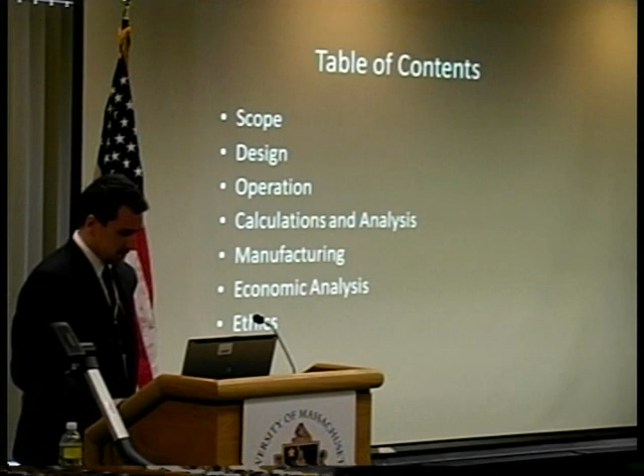The scope of our project is to design and build a deep ocean profiler capable of diving to 1,000 meters. It must be deployed and retrievable by one person, autonomously operated, and capable of taking measurements of temperature and pressure. We were given a budget of $3,000, and we had to design and choose all components to withstand a minimum

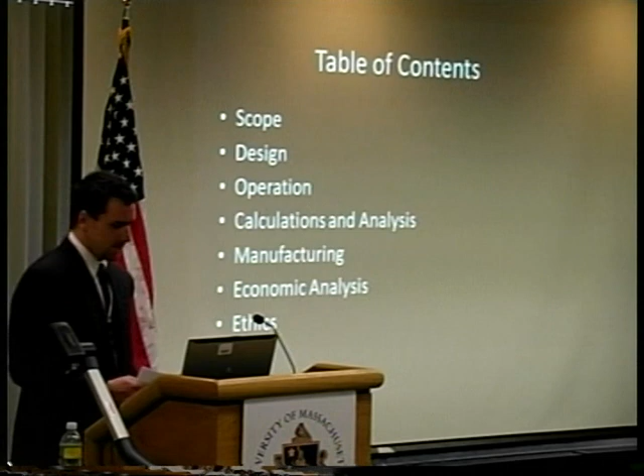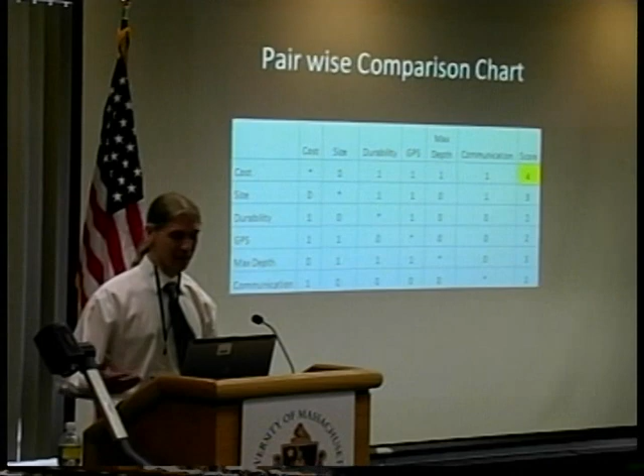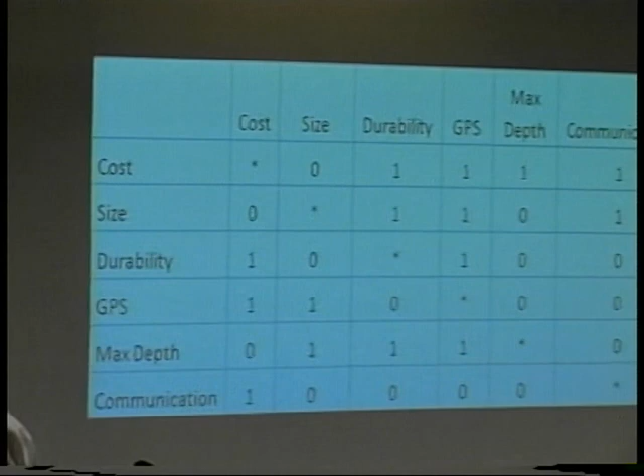of 1400 psi, the operating pressure at 1,000 meters. To distinguish our project from other devices out there, we focused on a few particular attributes. We chose cost to be most important, because what's already out there is very expensive, and with our budget being just a tiny fraction of the cost of a more professional device, we decided that's what we'd focus on. We also wanted something small, to be deployed and retrieved by a single person, which also saves a lot of money in the long run by not having to rent a crane and boats every time.

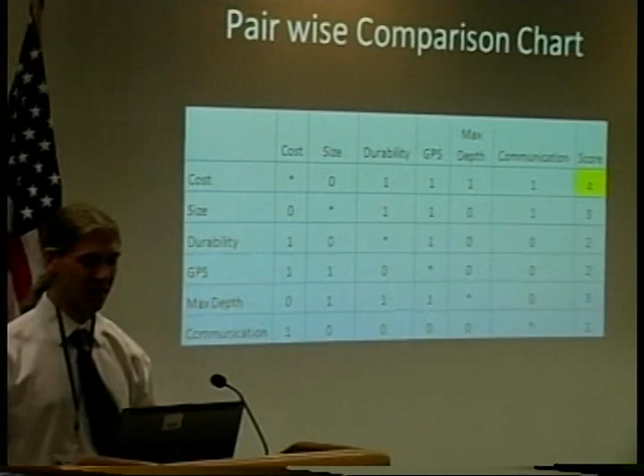We ended up deciding that GPS and communication were just outside of our scope for this project. We didn't even focus on them.

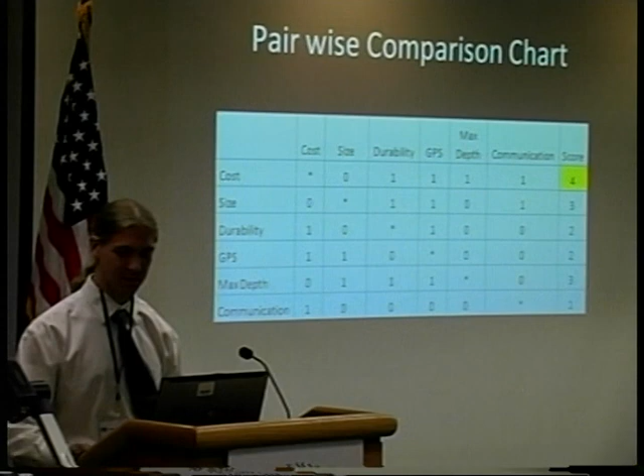We had several options for our hull, whether we wanted it made of aluminum or something stronger like steel. We had to choose various shapes. Something spherical has the benefit of being equally pressured on all sides, but it's very difficult to manufacture. And we had the option of several different O-rings, which was a design choice as well.

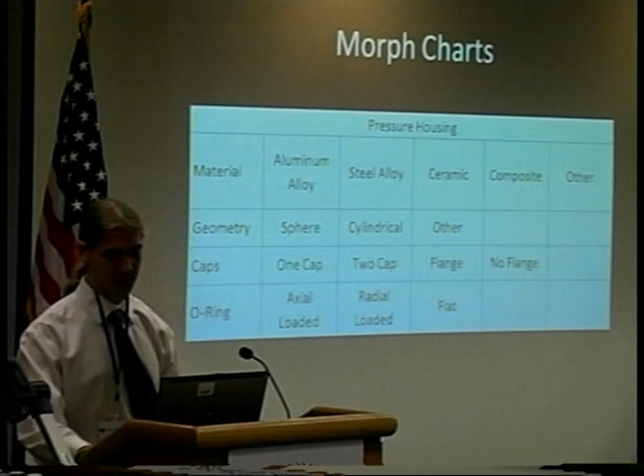For the buoyancy system, we had to choose between various working fluids, such as compressed air or carbon dioxide, if we wanted an oil bladder that would be inflated and deflated for buoyancy. And we had to decide if we wanted the chamber exposed to the ocean or self-contained.

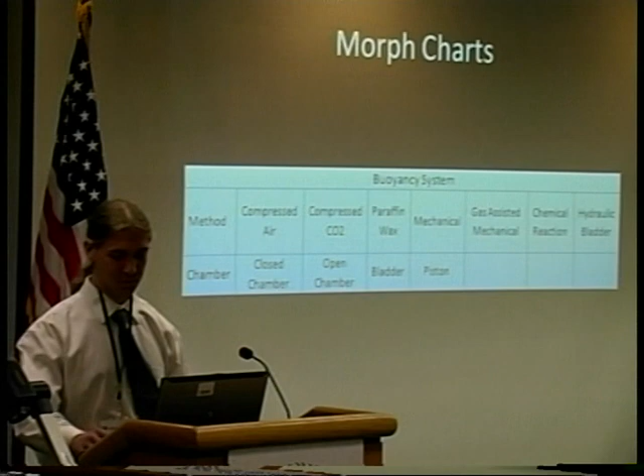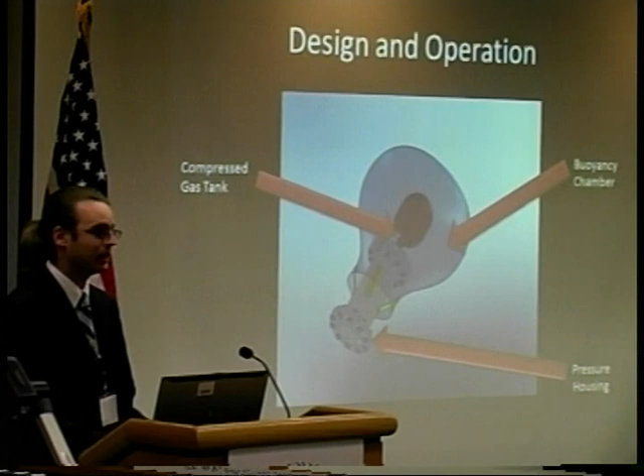So the design we came up with: existing systems are normally deployed from a large ship, with instruments attached to a cable and lowered by a crane, which is very expensive because you need a crewed ship. The other option is using an AUV, an autonomous underwater vehicle, which also needs a crane to deploy and is very expensive to purchase. So our goal was to make a product that was cheaper and easier to deploy.

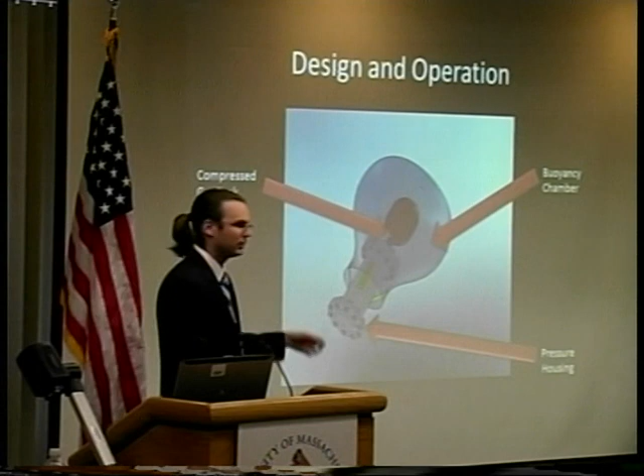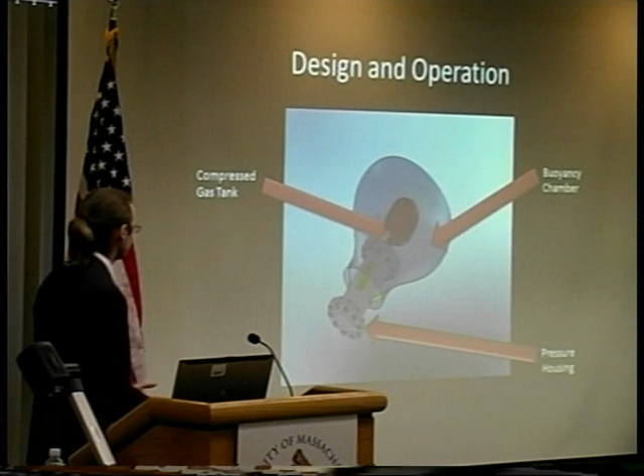The solution we came up with is an open buoyancy chamber compressed gas system. It works in three separate parts: there's an open buoyancy chamber, exposed on both sides to the pressure of the ocean; there's a pressure housing, which protects the microcontroller, the batteries, and all the electronics from the ocean water;

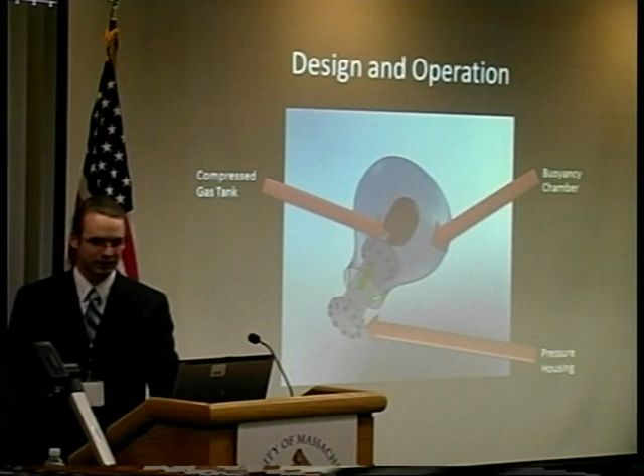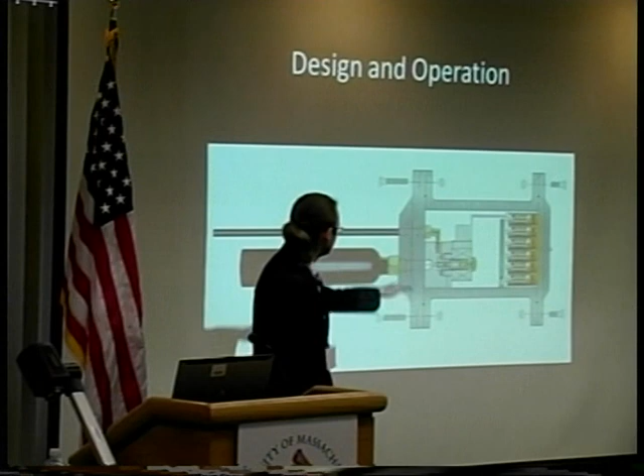and there's a compressed gas system, which uses compressed gas controlled by a solenoid to modify buoyancy once it's ready to surface. This is a cross-section of our device. We have the compressed gas system attached to a high-pressure solenoid, which is released back into the open buoyancy chamber, controlled by a microcontroller, along with our batteries, and a temperature and pressure sensor at the bottom.

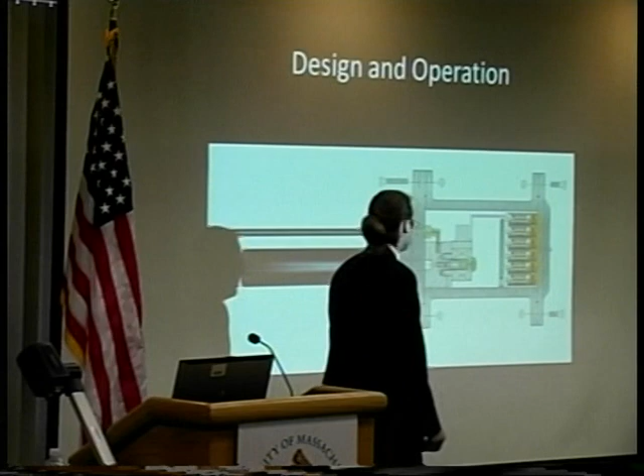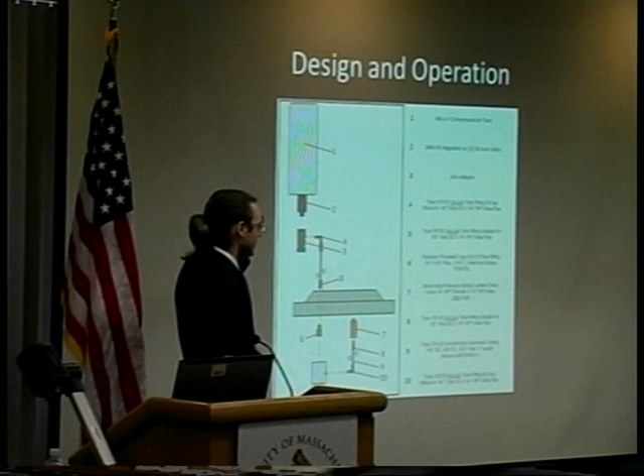This is a breakdown of how our compressed gas system works. We have a 3,000 psi tank regulated down to 2,000 psi, a shut-off valve connected to high-pressure hosing into the high-pressure solenoid, back out through a check valve, and back into the buoyancy chamber.

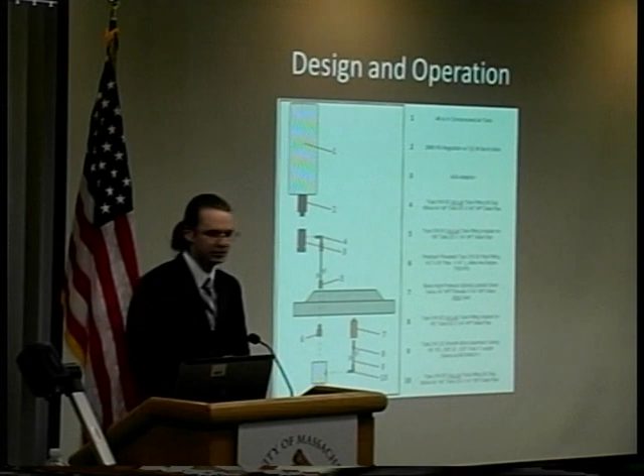The way our device is designed to operate: when it's on the surface, the microcontroller goes into dive mode. In dive mode, there's a solenoid at the top of the buoyancy chamber that opens, allowing the air in the buoyancy chamber to leave and flooding it. As it floods, that decreases its buoyancy, and eventually the device will begin to sink.

Once the microcontroller senses that it's sinking, it goes into sink mode, where it closes the solenoid so that it has a steady dive, and then senses, am I diving, am I diving, am I diving, and if it's still diving, it continues in the dive mode. Once it reaches the maximum depth that it's programmed to reach, it goes into surfacing mode.

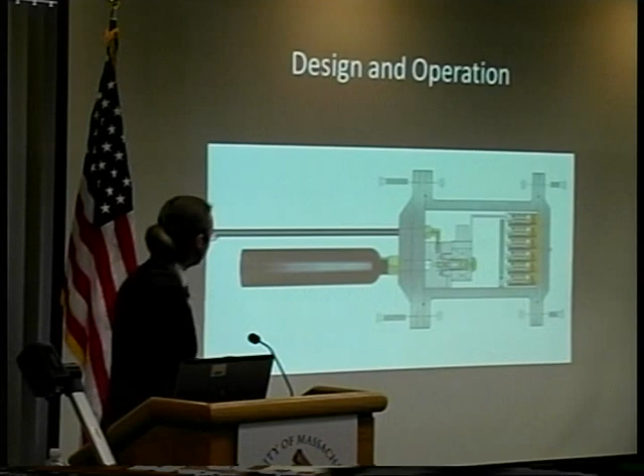It will open up the high pressure solenoid inside the chamber, and this high pressure solenoid releases gas through the high pressure lines into the buoyancy chamber. It will do that in 1 second pulses, and keep doing that until the microcontroller senses that it's rising, and then it goes into rise mode, sensing, am I rising, until it reaches the surface.

It also has a fail-safe mode, so if it's not receiving depth readings or pressure readings, after a certain amount of time, it will open the high pressure solenoid and just flood the tank to do like an emergency blow, or like a submarine. So what I'm going to show you now is a video of one of the tests.

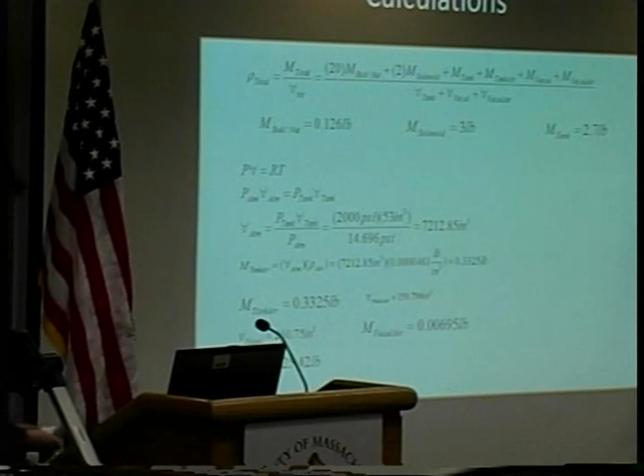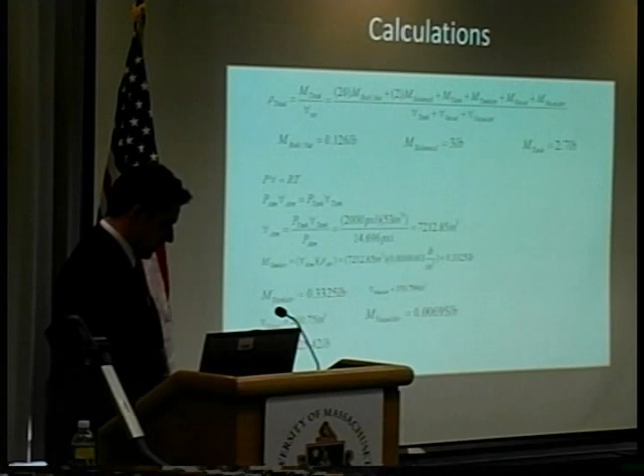The buoyancy calculations were very helpful in designing the buoyancy chamber. The mass of the pressure vessel and all the components we actually had to approximate because we didn't have these items when the buoyancy chamber was constructed. The density of the device minus the buoyancy chamber is determined by dividing the total mass of the device by the total volume. This yielded a specific gravity of 2.

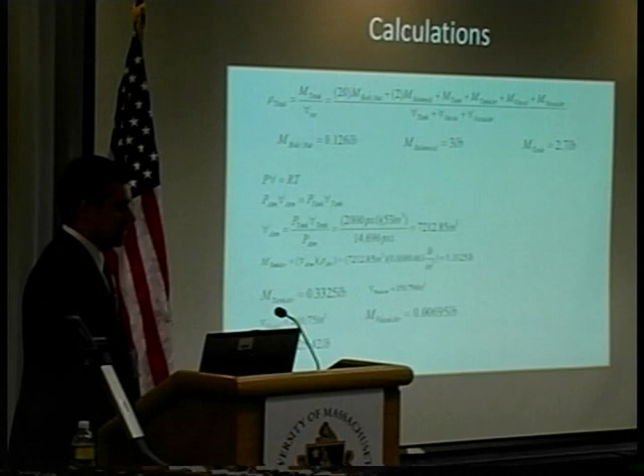We wanted to know how much additional volume was required to create natural, or neutral, buoyancy in the water with our device. We did this by setting the density of our device equal to the density of our water. We calculated the minimum diameter of the buoyancy chamber. The buoyancy chamber is spherical, so we wanted to find the smallest diameter possible to actually keep it afloat. We came up with about 10 inches, and so knowing that it's 10 inches for the minimum diameter, we went and made about 14 inches in diameter for our actual buoyancy chamber, just as a fail-safe.

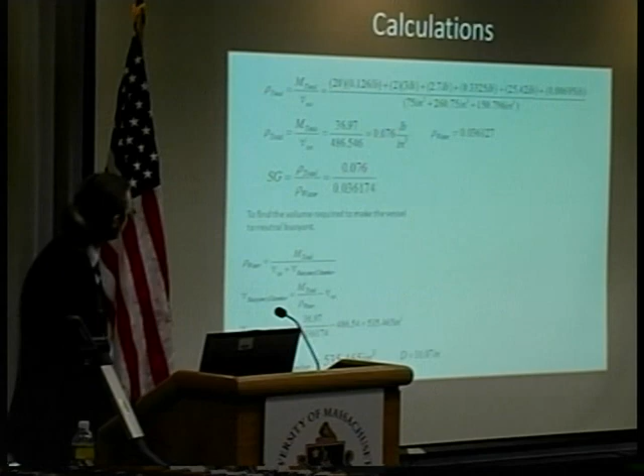This is the second half of the calculation, just stuff like that. So minimum diameter is 10 inches for that sphere.

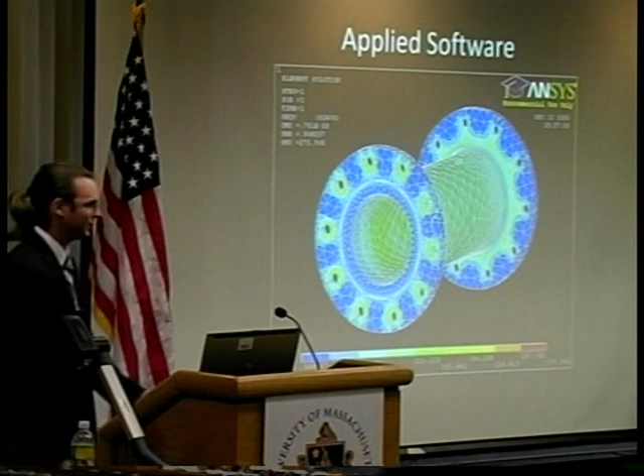To make sure that the device could withhold or withstand 1,000 psi, 1,000 meters of pressure, which is 1,400 psi, we did finite element analysis. So this is a full 3D rendering of our model, which we imported into ANSYS from SolidWorks, created a volume, meshed it. We fixed the bolts and fixed one side of the device.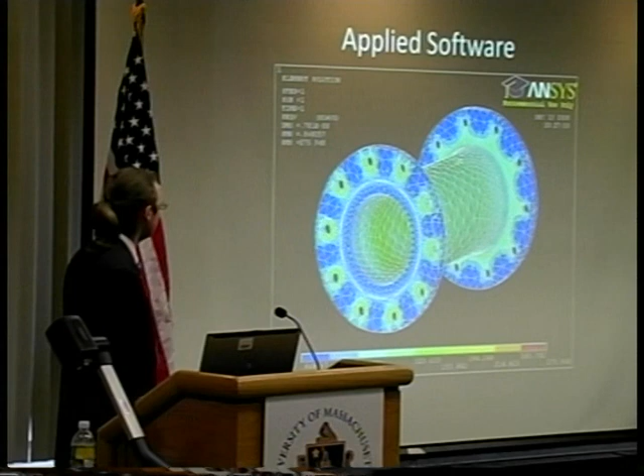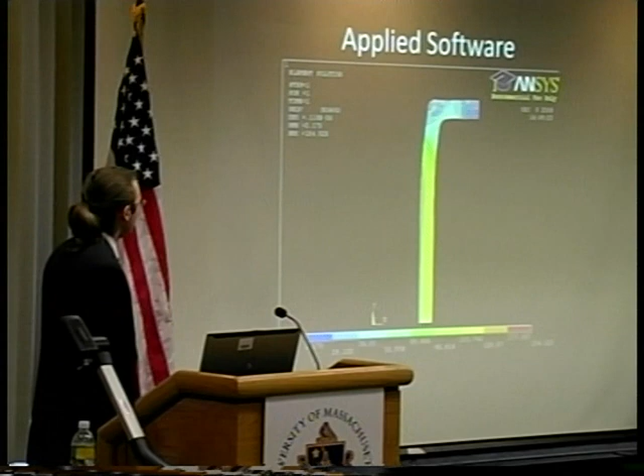The inside was set to 1 atmosphere of pressure, and the outside to 3,000 psi. What we found was stress concentrations, a bearing stress around the bolts, and we had a factor of safety of greater than 2 based on this. We also, to double check that, did an axisymmetric model, which is this one section of the wall, and we came out to very similar numbers.

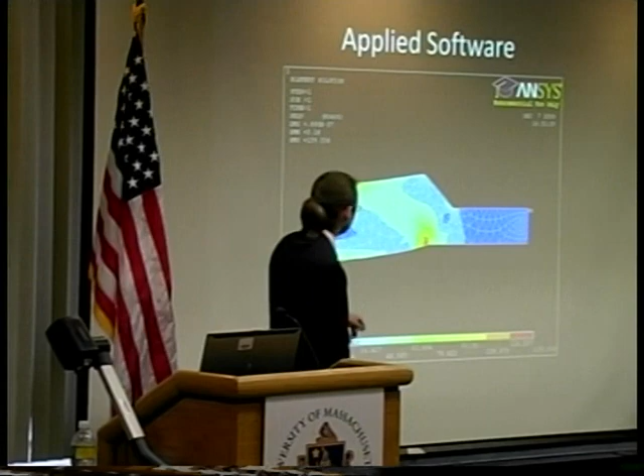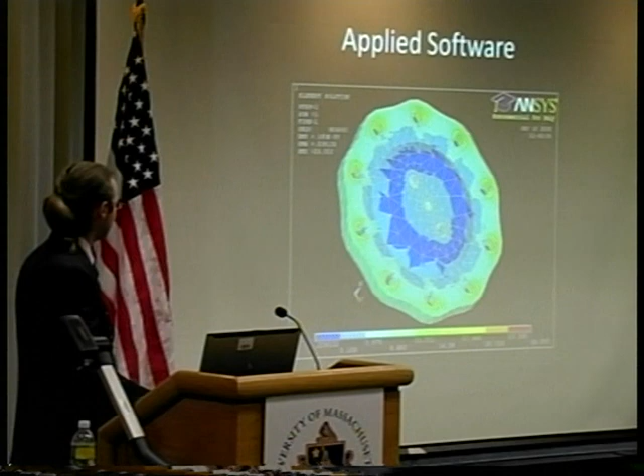We did the end caps. So this is an axisymmetric model of the end cap, and we found the stress concentration right at the flange and the wall that changed in geometry. Because of that, we modified our design and added a fillet to the inside and outside of the flange. This is a full 3D rendering of the end cap also.

And then to seal each end cap, we used a 1/16 O-ring, which was 5 inches in diameter, and 10 3/16 stainless steel bolts and washers.

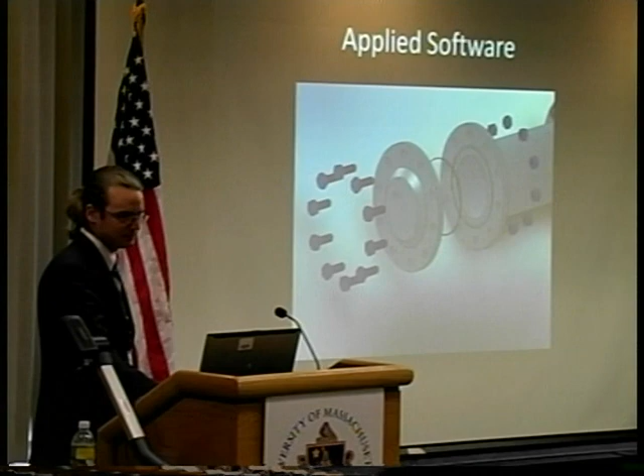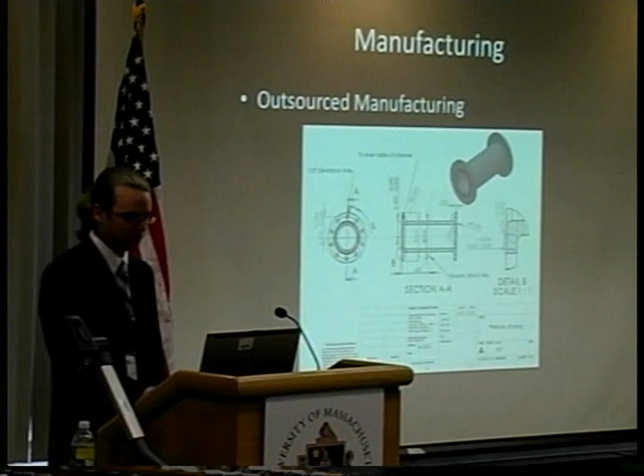Because the pressure housing was too large to really machine on campus, we had to outsource that and the end caps to a machining company.

The buoyancy chamber, we constructed with general all-purpose fiberglass. We actually bought fiberglass at Home Depot, that's how general it is. We use fiberglass because it's cheap, pretty easy to work with, and it has a very high strength to weight ratio.

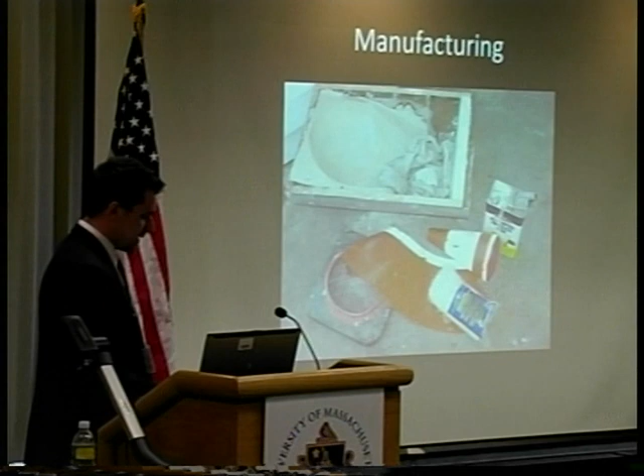As you can see, a mold in the back, it was not very precise, but that's a plaster mold we used to create the two halves of the fiberglass mold for the buoyancy chamber. We connected those with fiberglass, sanded it, and put some epoxy-based marine paint on it. We chose a very bright red color to make sure we can see it when it's deployed in the water.

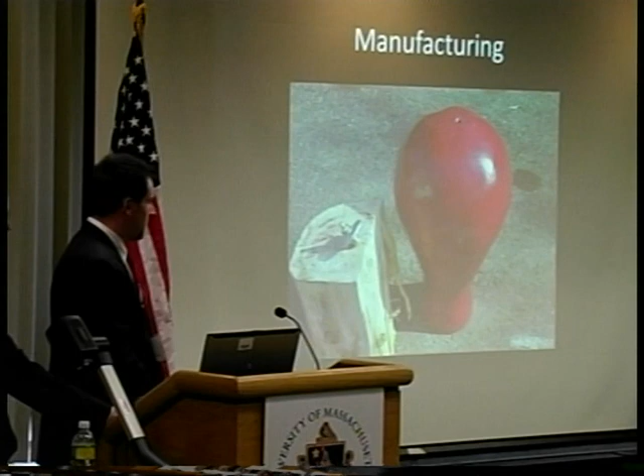We ran several tests for our device. The earliest tests were just to make sure the pressure hull was actually watertight, so we deployed it into the water, let it sink for a while, let it stay on the bottom for several minutes, then pulled it back up, opened it up, and saw if we had any water inside.

We also tested it with the buoyancy bell on top of it to see how well it would be buoyant. We found out that it was actually very positively buoyant, again because of the extra diameter added to the buoyancy bell.

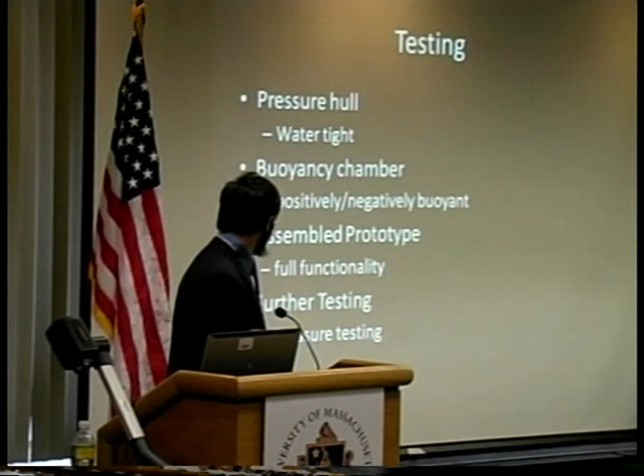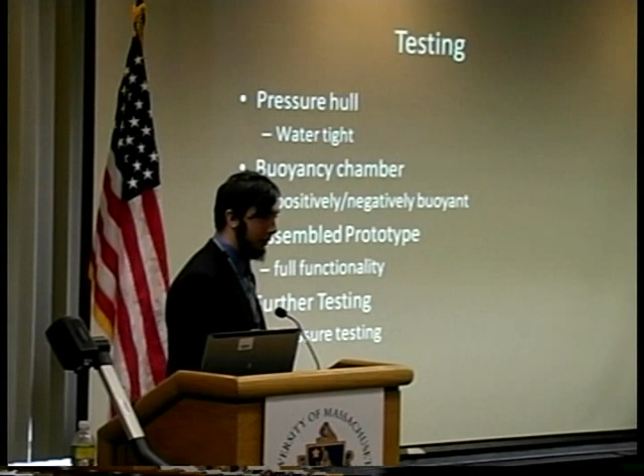We also assembled the prototype and tested full functionality with the microcontroller controlling both of the solenoids. That was shortly after testing the circuitry itself, which was done first with a variable voltage provider, and then this is some of the programming output.

We tested with a variable voltage provider to simulate the sensor input, and then tested with the actual sensor input to make sure the relays and solenoids were able to function properly.

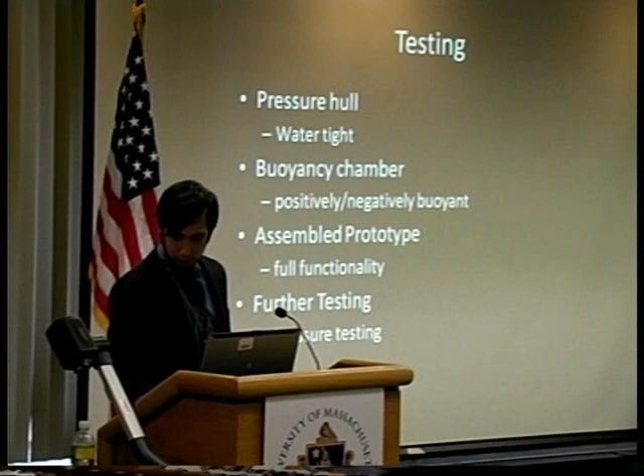This is just some of the debug information from the program while it was still connected to and communicating with the computer. This is me changing the input voltage, simulating the sensor input, watching the debug information, making sure the program recognized the input, recorded it as a pressure, recorded the temperature, was interpreting the voltages with the right calibration, and was responding properly by changing modes and firing the correct solenoids.

Again, as was said earlier, our device is a lot less expensive than devices that are currently available. Some of the devices from Webb Research are well over $50,000. They are much larger, require a crane to drop into the water, require a crane to retrieve, and require a much larger boat for all of those accommodations.

Our system does not require a crane, it can just be literally tossed in the water by one person, and it can be hauled up by one, possibly two people if it's still carrying a lot of water, but certainly not within the range of a crane. That means it doesn't need as big of a boat to bring in the crane.

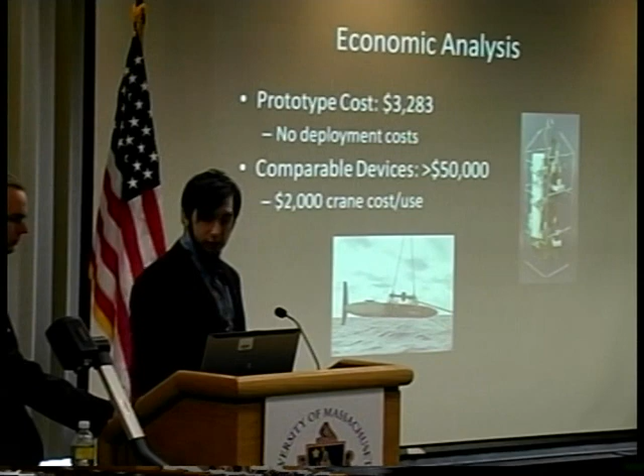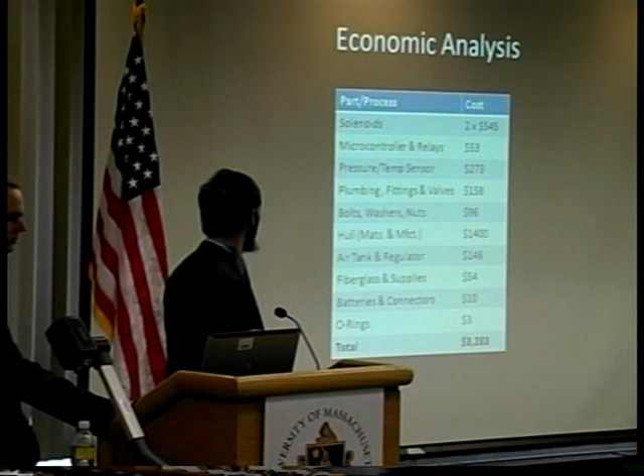This is just an analysis of our budget. Solenoids turned out to be very expensive because of the high pressures we were working with. The microcontroller was actually quite inexpensive, bought from an Italian company with an open source programming language.

The temperature sensor and pressure sensor were again a little bit expensive because it goes down to 2,000 psi. The supplies for the pressure hull were also designed to withstand that pressure and much more, with a factor of safety.

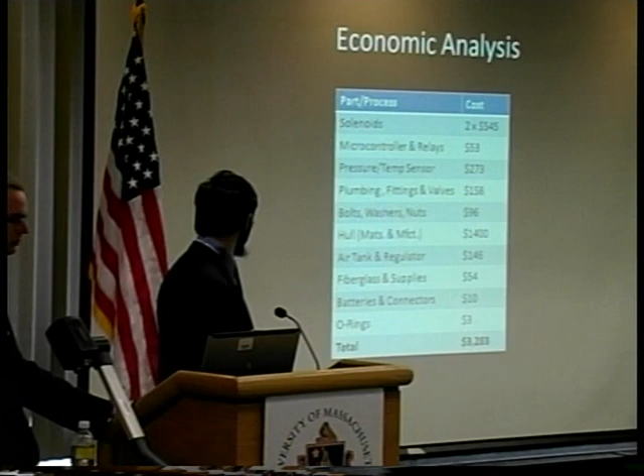As engineering students, it's important for us to make sure we were acting ethically throughout our project, and we feel safe to say that we were. This really has a negligible effect on the general public. We were honest with our client, which is always important, and we gave credit where it was due. However, with us being 4 mechanical engineering students and this requiring fairly extensive electrical engineering knowledge, we had to work a bit outside of our expertise. It was a learning experience, but it worked out for the most part.

In terms of the environment, we feel there's nothing hazardous about our project. It's using air, which is completely safe. It's all self-contained, there's no debris, and it's got a good structure to it. The alkaline batteries don't count as hazardous waste federally, though some states consider that to be a waste. And it has very high efficiency with very low power usage.

Are there any questions?